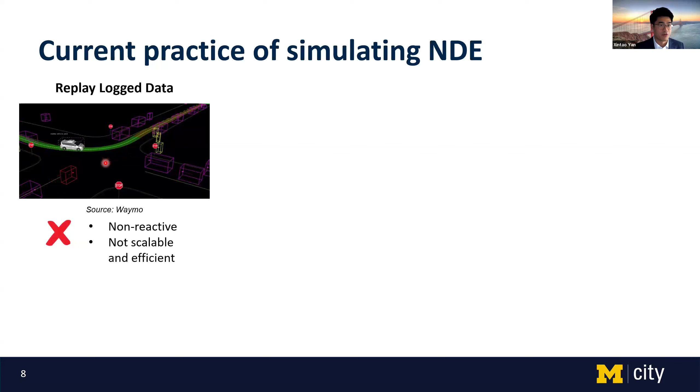So the deficiency of this type of method is obvious. This type of environment is non-reactive, which means the background agent, because it's replayed trajectories, cannot interact with the new version of your autonomous vehicle, so you cannot really test the effect of your improvements in the newer version of the software.

And another widely used approach is to use some simulation environment like a traffic simulator, for example, CARLA or SUMO. The basic idea of this type of simulator is that you divide the behavior of human drivers into car following models, lane changing models and gap acceptance models. By heuristically decomposing them into several different models, you can propose different numerical models to simulate the human driver's behavior. However, usually these types of models are oversimplified.

For example, the widely used car following model, IDM, the intelligent driver model, has 5 parameters you need to calibrate. However, you can hardly reproduce complex human driving behaviors using only 5 parameters. So that's the reason why this type of simulator could be subject to heuristics and not realistic.

And recently, there are also methods proposed based on deep learning and data-driven methods. The overall pipeline is to train your model to reproduce the observed trajectory using deep neural networks, and this is widely used for trajectory prediction. However, it should be noted that the pipeline for developing trajectory prediction methods tries to minimize individual trajectory level accuracy, like average displacement error, final displacement error, miss rate, etc. However, this is not equivalent to environment level accuracy.

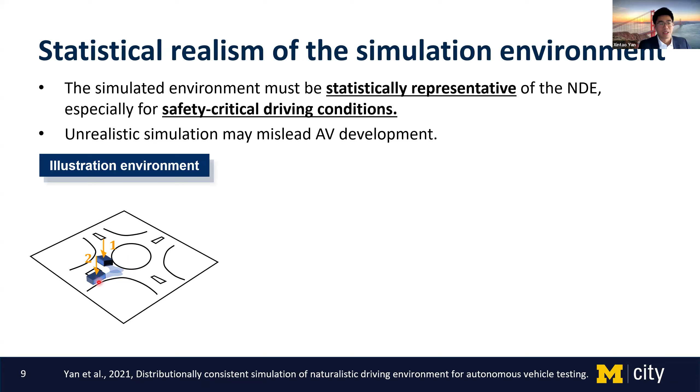So consider a roundabout scenario. There are 2 vehicles. Vehicle 1 is circulating in the roundabout, and vehicle 2 is at the entrance and about to merge. Let us assume the distance between these two vehicles in the real world follows an underlying ground truth distribution, as shown in this red curve. If your simulation has a different curve, as shown by this dashed blue curve, you can see it is distributionally different. And you will find out they could have a different estimated crash rate.

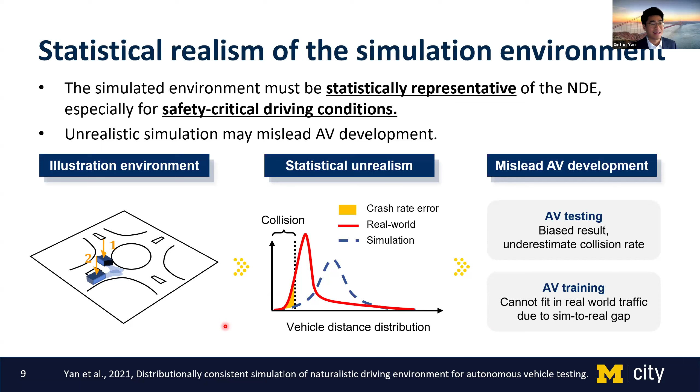For example, if the distance is smaller than a certain threshold and you consider it a collision, there will be differences in the estimated crash rate. So if one of the vehicles is an autonomous vehicle, your simulation will provide an optimistic estimate of the autonomous vehicle performance, and you will generate biased results, which could make your safety assessment results inaccurate. And also, if you train your agents in such an environment, the trained agent might not be able to fit in real world traffic due to this large sim to real gap. So you can find out that unrealistic simulation might mislead AV development.

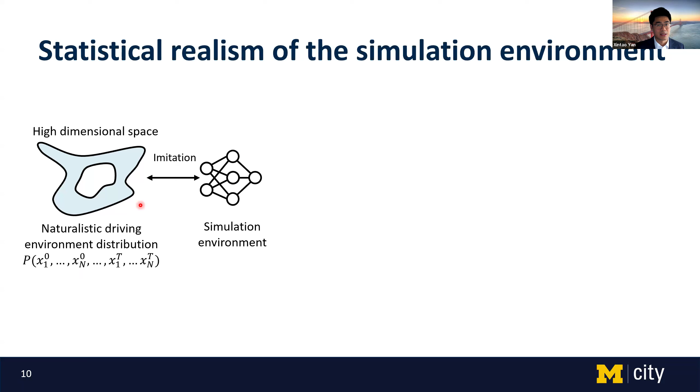And so in our work, as we mentioned, the real naturalistic driving environment is characterized basically by the state of each agent during the whole time horizon. It lies in a very high dimensional space. Our simulation tries to imitate this distribution and sample from it to generate each realization during your testing or training. And because this high dimensional distribution is so complex, you have no ground truth, so we cannot verify it.

So what we did is we try to verify some of the important marginal distributions, like the vehicle state distribution. For example, the vehicle velocity, the distance, the origin destination, traffic volume, etc. All those widely used metrics in the transportation area, we need to verify them and ensure your simulation is consistent with the real world.

But more importantly, there are new requirements brought in for this autonomous vehicle application, which is that you care about safety-critical events. So the simulated safety-critical statistics should be consistent. For example, the crash rate, the crash type, and crash severity of your simulations should be consistent with the real world. And also, in addition to collision, we also care about near misses, because a near miss is also an important event you need to test for autonomous vehicles. So the near miss statistics should also be consistent.

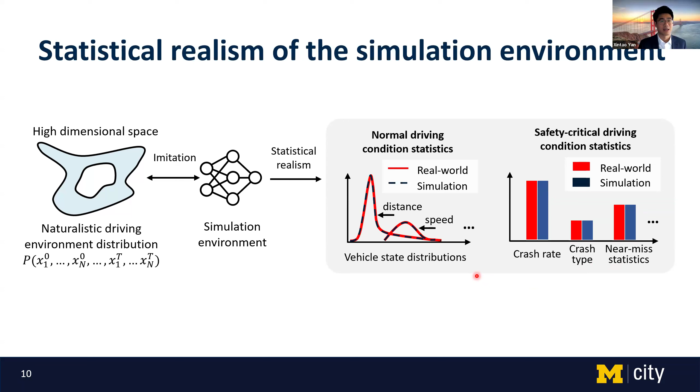So that's the whole philosophy behind our naturalistic driving environment modeling concept: we want to develop such a statistically realistic environment for simulation. So to tackle this problem, we developed a deep learning-based method called the neural NDE, and try to reproduce such a naturalistic driving environment with statistical realism. It has been published in Nature Communications and featured as a journal front page article. And I will introduce it in detail.

So we framed the behavior modeling under the imitation learning paradigm with deep neural networks under the supervision of real-world data. So basically, you want to obtain the joint distribution of all your simulated agents based on their historical states and also environment context information. And we develop this as a unified model. So we do not need to introduce subjectivity of behavior states. Like, we don't need to decompose the behavior into car following and lane changing. So this can reduce the subjectivity and improve the fidelity.

And we assume the joint distribution of multi-agents will follow a certain distribution. In this study, we assume it follows a multivariate Gaussian distribution. So basically, you need to generate the mu and the covariance matrix for the joint distribution so you can sample from it to generate the action. And to accurately model it, we use a transformer as a backbone to develop the whole model. And here is an introduction to the network structure. So actually, it's very straightforward and simple.

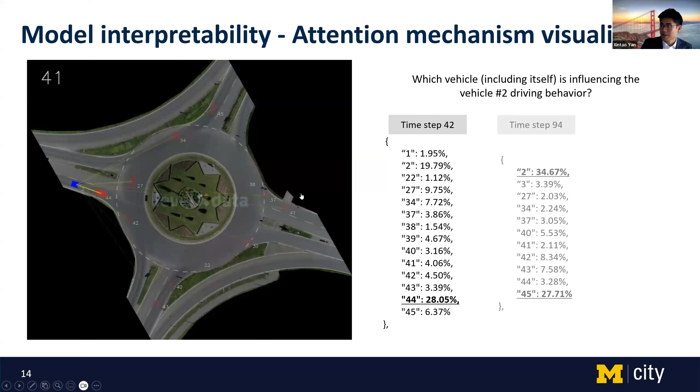And if we look at the next moment, for example, moment 94. Okay, somewhere here. So at this moment, the ego vehicle is about to enter the roundabout. So firstly, it pays a large attention to vehicle number 45, which is the vehicle in the roundabout and currently has a potential conflict with vehicle number 2.

And more importantly, you can find that it also pays a large amount of attention to itself, to its own historical state. The reason is that if the vehicle had a high speed previously, then maybe vehicle number 2 will not choose to stop but just aggressively merge in. But if vehicle number 2, as shown in this example, currently has a low speed and already stopped, then maybe this vehicle will also choose to stop and yield to this vehicle, and after that, it will merge into the roundabout.

Which means that its own historical states will also have a large influence on its behavior at this moment. So finally, let's look into moment 219, at the end. When the vehicle is about to leave the roundabout, you can see there are no vehicles around it, so it pays a large amount of attention to itself, which is also intuitive.

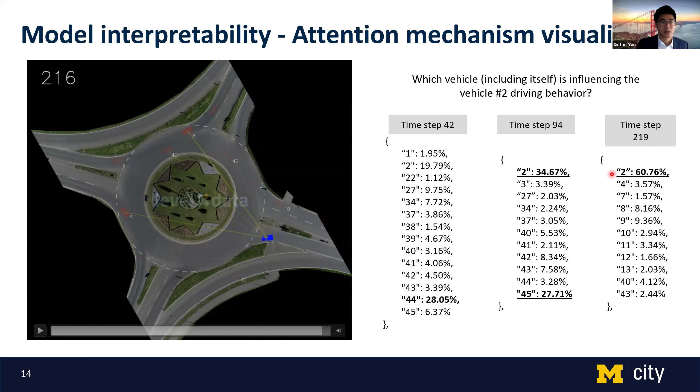So from these results, you might think, okay, the problem is solved. You have a model that can generate the simulation, it seems reasonable, the attention looks correct. So let's generate the simulation. We run a large number of simulations using these models, and we find the result is not good enough.

We find the simulated crash rate is around 2 times 10 to the minus 1 crash per kilometer, but the ground truth for this location is around 1.2 times 10 to the minus 4, so the simulated crash rate is significantly higher than the real world. And also the generated crash types are not consistent with the ground truth data.

The reason is that the behavior modeling network cannot achieve distribution-level accuracy in those safety-critical conditions, because your training data is overwhelmingly from normal driving conditions. So the safety-critical part is not well trained, which makes your simulation not good enough. That's why we further developed two modules, called the conflict critic module and the safety mapping network, to improve the modeling accuracy. I will use some figures to illustrate the idea.

The output of your behavior modeling network is the joint action distribution of multiple agents. There could be unrealistically high conflict probability due to the modeling accuracy. So after you sample the behavior, there could be a potential conflict. Then every time, you pass your sampled trajectory at every moment to this so-called conflict critic module. Basically, it outputs a certain acceptance probability.

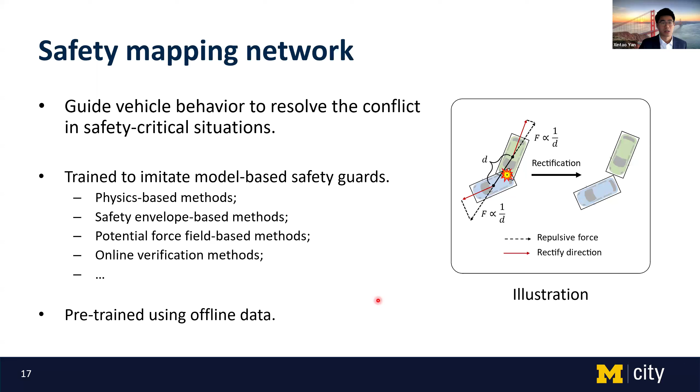And here is the final training pipeline for the neural NDE: we adopt a GAIL framework, generative adversarial imitation learning. We introduce a discriminator that tries to distinguish whether your simulated trajectory is realistic or not, to further tackle the distribution shift issue in simulation.

Also, we don't only sample one step like in trajectory prediction methods; we roll out the trajectory multiple times so that during training you imitate what you do in simulation. This further improves model performance and tackles the distribution shift, or what we call the error accumulation issue.

Okay, so I want to first play a video. One video is purely data replay of real-world trajectories, and one is pure simulation by our models. You can see from both videos there are realistic behaviors like yielding, merging, communication between vehicles, and sometimes even overtaking within this two-lane roundabout. Let's wait a little bit.

So you can see it looks pretty good. Okay, here is the overtaking in the two-lane roundabout. So arguably, it's visually indistinguishable.

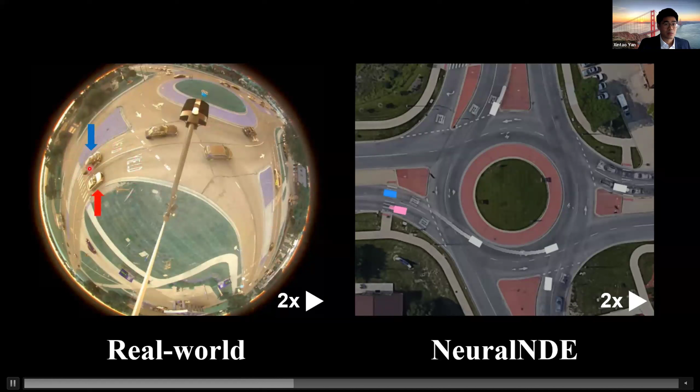And the second example is the sideswipe collision caused by improper lane usage. So you can see these two vehicles were driving in parallel previously. And later on, one of the vehicles improperly steered into the other vehicle's lane, and the collision happens. And we can also simulate similar patterns in our simulation.

And the last one is the rear-end collision. So in this example, you can find the following vehicle failed to maintain a safe gap with its leading vehicle. So a rear-end collision happened here. And also we can generate similar patterns in our simulations.

Okay, so after all this qualitative analysis, what we really argue is statistical realism, right? So here are some results. The simulation setting is that each simulation runs for 1 hour. So it's a really long time horizon simulation, and we run 15,000 simulation hours in total to collect the data.

And we verified both the normal driving condition statistics and the safety-critical condition statistics, including crash events, near-miss events, and also a lot of metrics we use in transportation, like speed distribution, distance distribution, yielding behavior, origin-destination, traffic volume, etc. And due to the time limit, I will mostly focus on the safety-critical metrics.

So the first one we care about is crash rate. The crash rate of the simulation is 1.21 × 10^-4, and the ground truth is 1.25 × 10^-4. So you can find this is pretty similar. And crash rate is a more overall measurement. We can also generate the detailed composition of different types of crash and also the severity of the crash based on the speed difference of the two agents at the crash moment.

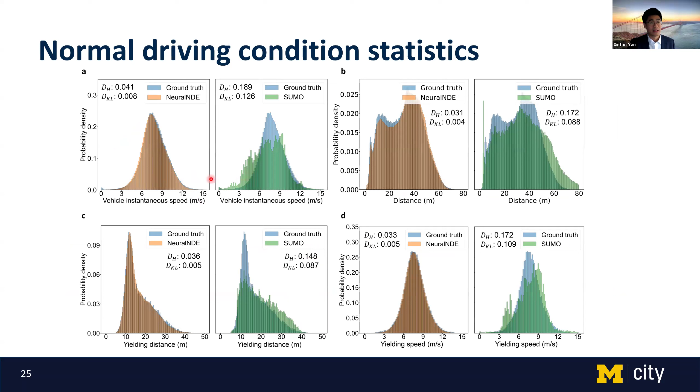Yeah, so that's the first part I want to cover in this talk, about how you can generate the simulation, because this is the foundation for the development and also the testing of the autonomous vehicle. So in the second part, I would like to introduce how we accelerate the process to make sure your testing is efficient.

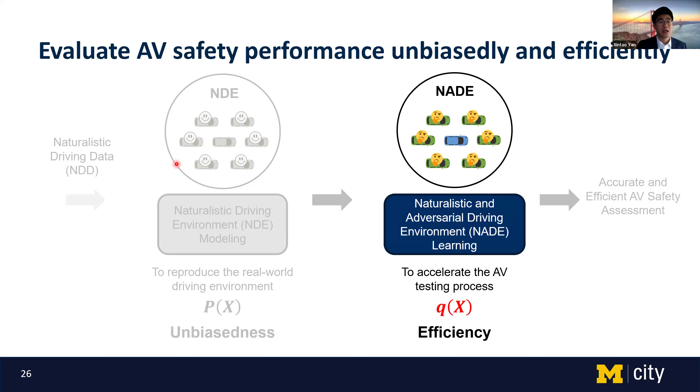So the idea of the naturalistic and adversarial driving environment is developed from NDE, but with some sparse but adversarial adjustment of the behavior of the agents. So for most of the time, the agents will follow a naturalistic behavior. And only at specifically identified moments, identified agents will perform some carefully designed adversarial moves to try to challenge the autonomous vehicles. So you can enhance the probability that an autonomous vehicle encounters safety critical events, so you can accelerate the process.

So the whole idea here is that we want to train the background agents to learn in what circumstances which background agents will perform what adversarial moves at how much probability. So that's the idea of the NADE. So this can be formulated as a reinforcement learning problem. So at the specific state S, we want to output the action. We want to basically refine the action distribution of each agent and try to improve the testing efficiency.

And so the idea is that we can develop the reward function based on the importance sampling theory, because optimizing the estimation efficiency is equivalent to designing the importance function to minimize the estimation variance. So we can develop a reward function based on this idea and we try to train this using the deep reinforcement learning paradigm.

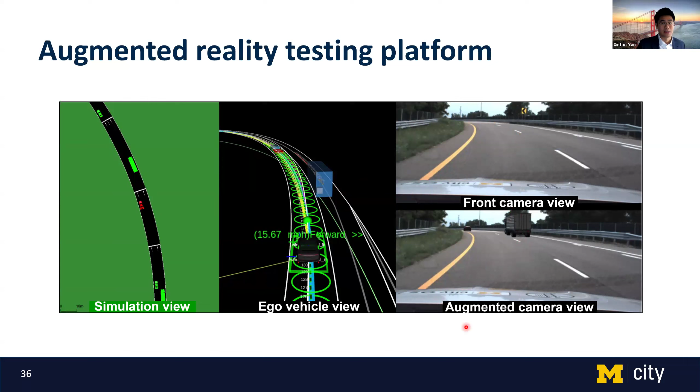or through the internet. So from the autonomous vehicle's perspective, as shown in this view from AutoWare, there are a lot of surrounding agents, and it needs to properly interact with them. The right-hand side is the real-world implementation. Here's the front camera view during the test, and we can superimpose the AR background traffic images onto this front camera to generate this augmented camera view. We can use this platform to test autonomous vehicles. And we deployed this platform in 2 testing facilities. The first one obviously is Mcity at the University of Michigan.

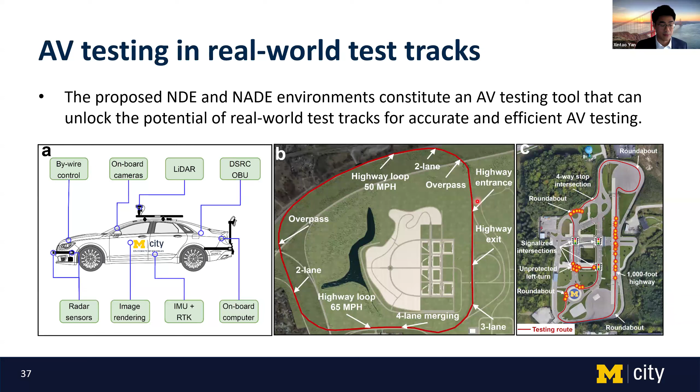And the second one is ACM, the American Center for Mobility. It's a commercial testing facility. And here is a video showcasing the testing process. So here is a real Lincoln MKZ running in Mcity.

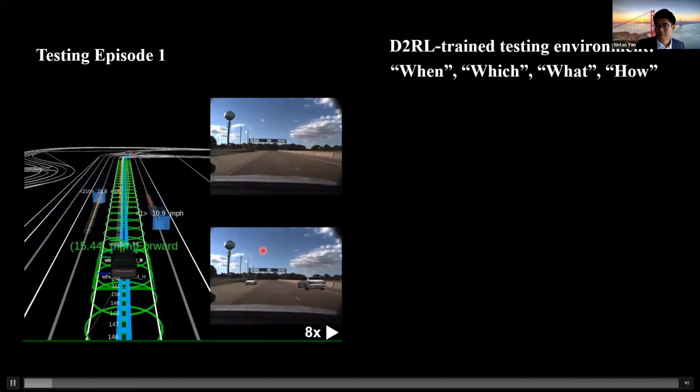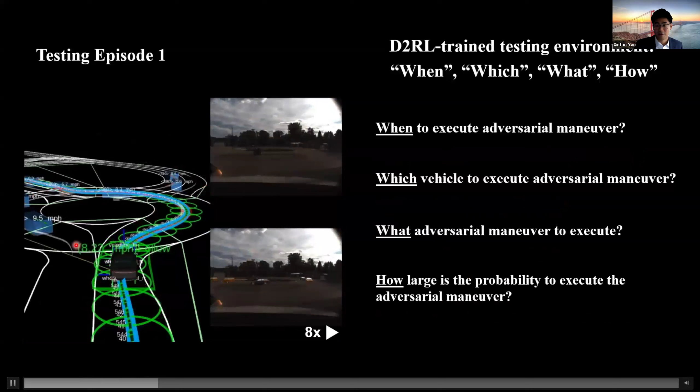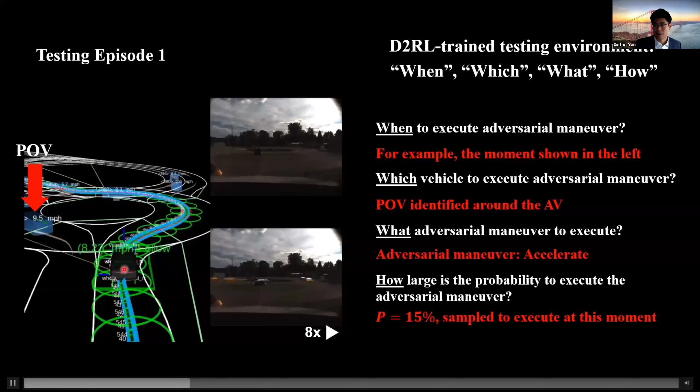And then we continue running in this time-continuous traffic environment to test the autonomous vehicles in a 24/7 manner. For example, here is a roundabout situation. So at this moment, the principal vehicle will try to aggressively accelerate to evaluate whether the AV can properly react, and the collision happens at this moment.

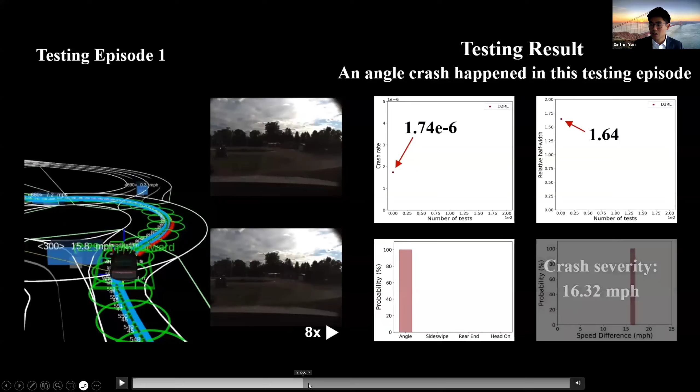So basically, we find out an angle collision at this moment, and based on this likelihood, we can obtain the estimated crash rate and the relative half-width, and also generate the crash type estimation and crash severity estimation. And the idea here is that you run a large number of tests following the same process, and after doing the running process, you can obtain the estimation of your crash rate and all other statistics.

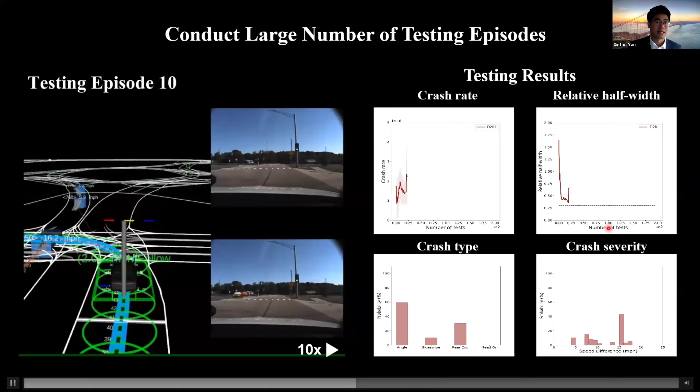And after you converge, you will stop, and you can think you have already finished the testing and get the final results. So this is the real-world implementation.